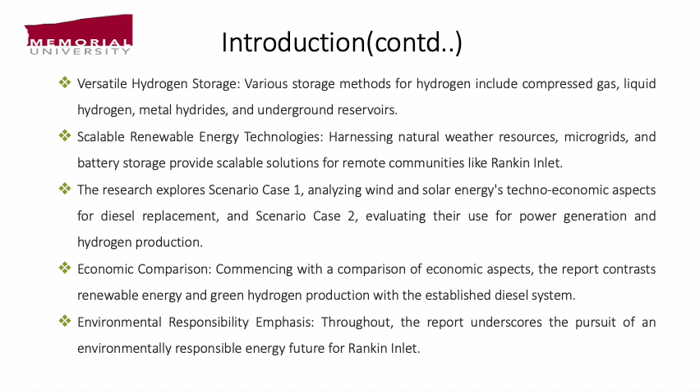The objective of scenario A is to conduct a techno-economic analysis of wind and solar energy, focusing on replacing the diesel system with renewable energy. The objective of scenario B is to perform a techno-economic evaluation of the wind and solar energy as well, and also to look at a way to produce energy and use that electricity to produce hydrogen in Nunavut, in Rankin Inlet.

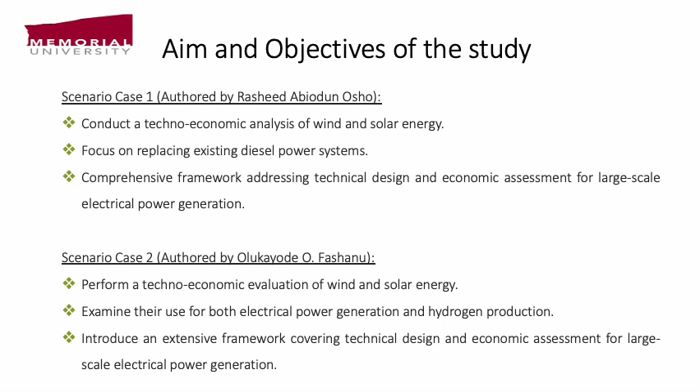Rankin Inlet is located in the Kudlulik Peninsula in Nunavut. It's the second largest community, just after Iqaluit, which is the capital. It has a population of about 3,000 people, and it occupies an area of about 20 square kilometers.

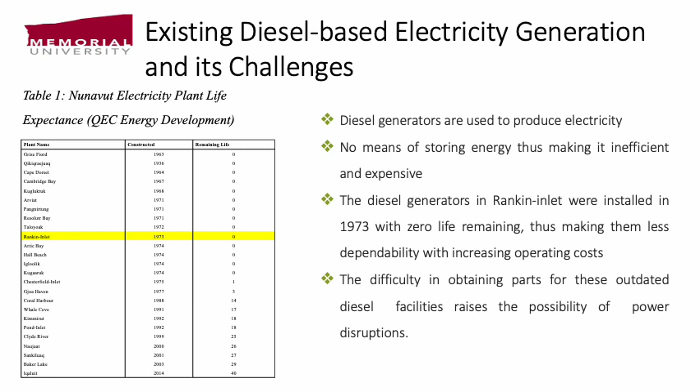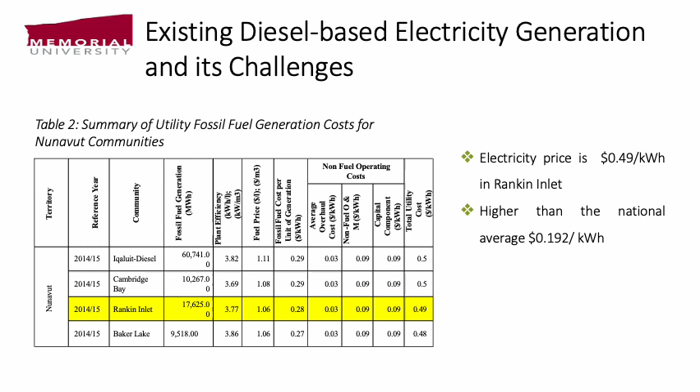The existing diesel system in Nunavut and the challenges: a look at the table shows us that the diesel generator in Rankin Inlet was established in 1973. That means it's old, with attendant repair and maintenance costs, which is making the cost of electricity quite high. As seen from the table, the cost of electricity in Rankin Inlet is 49 cents per kilowatt hour, which is higher than the national average of 0.192 per kilowatt hour, and that calls for immediate attention.

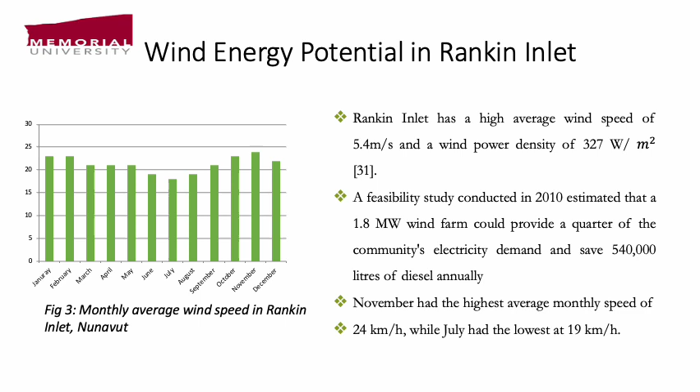Methodology: as said earlier, we have divided this study into two scenarios. Scenario one looks at the techno-economic assessment of wind and solar energy to replace the existing diesel system. Scenario two looks at evaluating utilizing wind and solar energy for both electrical energy generation and hydrogen production.

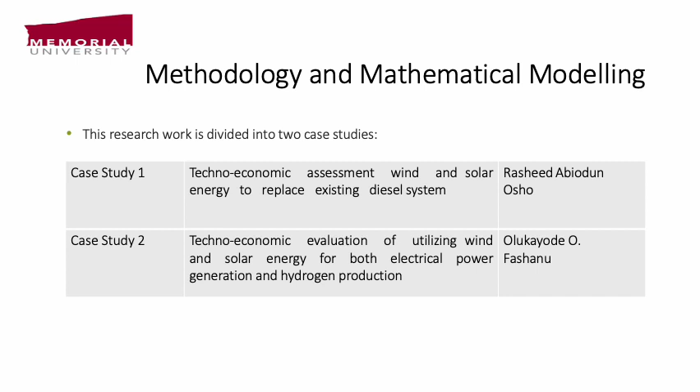Case study one evaluates wind and solar power energy to replace the existing diesel electricity. The Rankin Inlet load is about 17 million kilowatt hours per year, which comes to about 2.3 megawatts, and with a reserve margin of 15%, it comes to a daily load requirement of about 55,000 kilowatt hours per day. So the proposed renewable energy solution must be able to meet this need at a cost that is competitive.

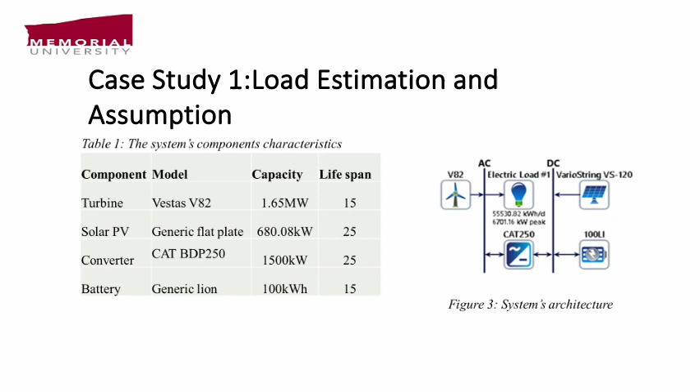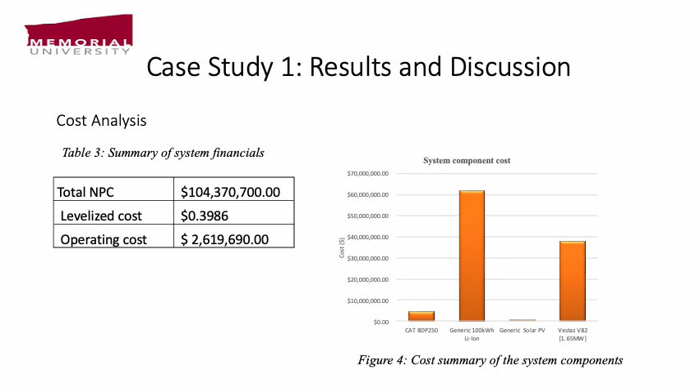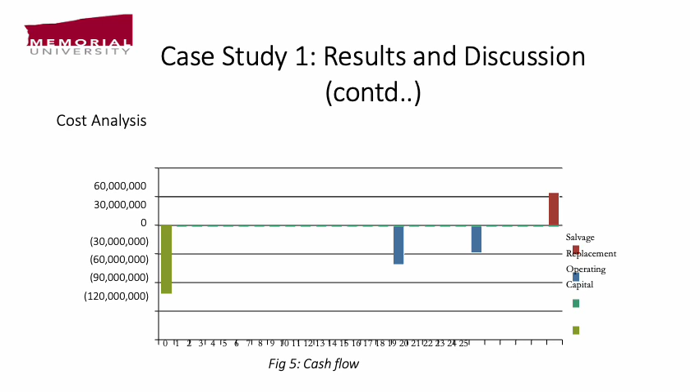Next is the cash flow. As seen on the graph, the capital cost is a bit high, followed by the operating cost, and finally we have the salvage, which is coming from the turbine and the battery.

Continuing the results and discussion, the generation of power with the proposed system is 36,000 megawatt hours, majorly coming from the turbine. Turbine is giving us 99%, while the solar PV is giving us about 1%.

Next we see the graph which compares production with consumption and excess. Production stands at about 36 megawatt hours, while consumption stands at 20, and then we have an excess of about 16 megawatt hours. The excess can be used for other applications. We can even sell it to the grid and make some money for the community.

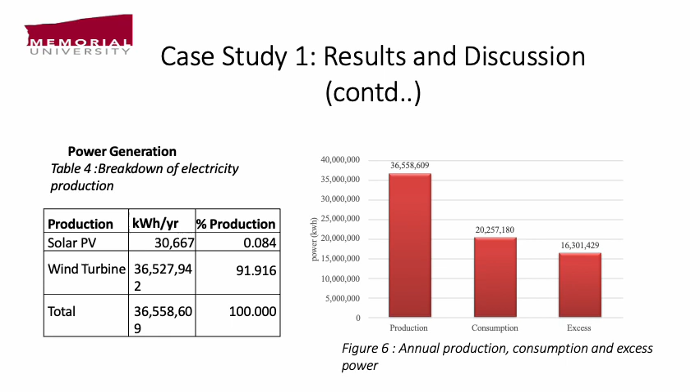Finally, under case study 1, we're looking at the economic analysis and comparison with the diesel system. From the table, we can see that with this proposed system, we will be saving. Of course, first we're seeing that we're generating over 100% of the required load, which means that the system can actually replace the existing system in Rankin Inlet.

We can also see that the LCOE is 0.39, which is less than the cost of the electricity. Electricity is sold at 49 cents, while the LCOE is 39 cents. That's very good. It means that the project is investment worthy.

We can also see that the diesel system is consuming about 4.6 million liters of diesel every year, which comes to about $5.6 million that will be saved with the use of this proposed renewable solution. And finally, we have the GHG emission coming to about

14,800 tons of CO2 equivalent with the use of the diesel system. With the renewable energy solution that we're proposing, that amount of GHG will be saved, and if we apply the rate of emission, which is about $50 per ton of CO2 equivalent, we would have an annual saving of about 740,000 Canadian dollars every year. That comes to a lot of savings. So it means that this system that we're proposing is economically viable, and the impact on the environment is also quite minimal.

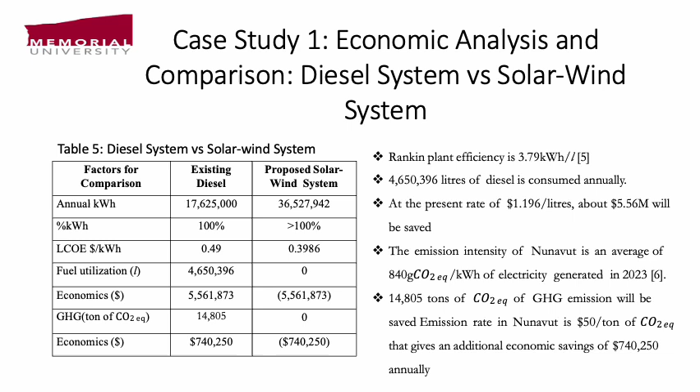So the annual cumulative electrical load, the annual electrical load in Rankin Inlet is 17,625 megawatt hour per year, which running to a daily average of 48,287 kilowatt hour per day.

In this simulation, we have an additional energy load of 1,230 kilowatt hour per day, which is required for the compression and intercooling process of hydrogen at a rate of 6 kilowatt per kilogram to store about 205 kilogram per day.

Consequently, the total energy demand will now amount to 49,517.70 kilowatt hour per day.

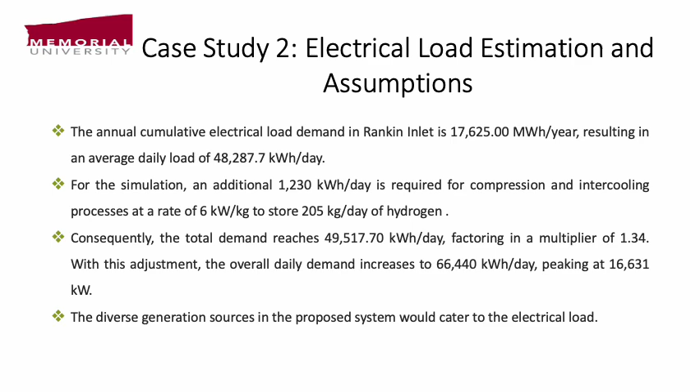By factoring the multiplier factor of 1.34 with the adjustment, the total load will now result to 66,440 kilowatt hour per day, peaking at 16,631 kilowatt. These are the generation sources in the proposed system that will cater for the more electrical load and the power that will be required to generate more hydrogen through the electrolyzers.

As I mentioned earlier on, these are the parameters we consider. According to Statistics Canada, the total number of registered vehicles as of 2019 in Nunavut is about 7,019 vehicles.

So that means that by using the mathematical modeling, since we know the total population to be 36,858, with Rankin Inlet having about 2,975, we can deduce that the total number of cars being used in Rankin Inlet to be 573 cars.

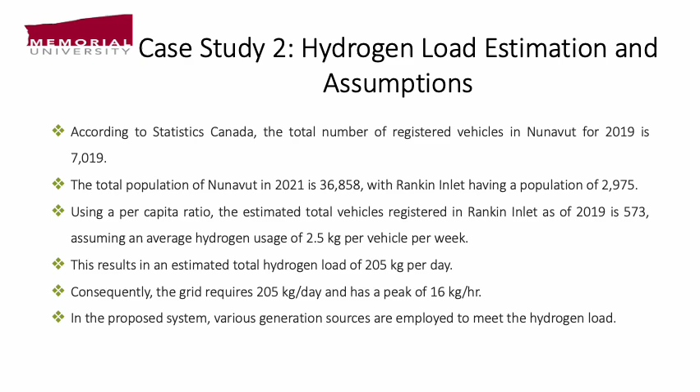So that means that by considering 2.5 kilograms per vehicle per week, by doing these calculations, we can conclude that Rankin Inlet will be consuming about 205 kilograms of hydrogen per day if we are to use fuel cell electric vehicles in Rankin Inlet.

The system architecture is set up. The whole equipment we are using for these simulations are listed in table 6.

As we can see, PV dedicated converter storage, battery storage. In this case, we are considering a generic battery, 4 hours, 1 megawatt lithium-ion battery. We are having a size of 12 strings, a system converter of CAT BDP 250s, electrolyzer of about 10,455 kilowatts, and the dispatching strategy we are using here is HOMER load following.

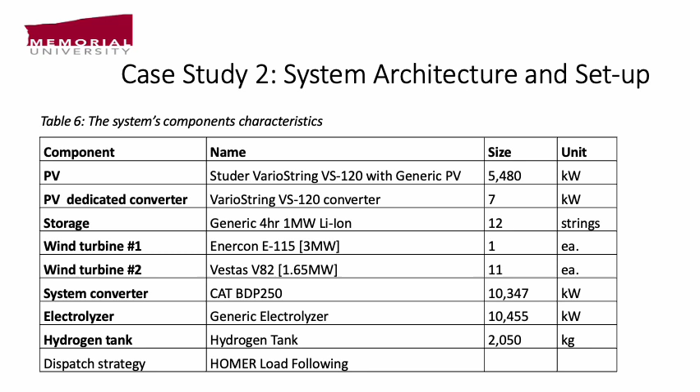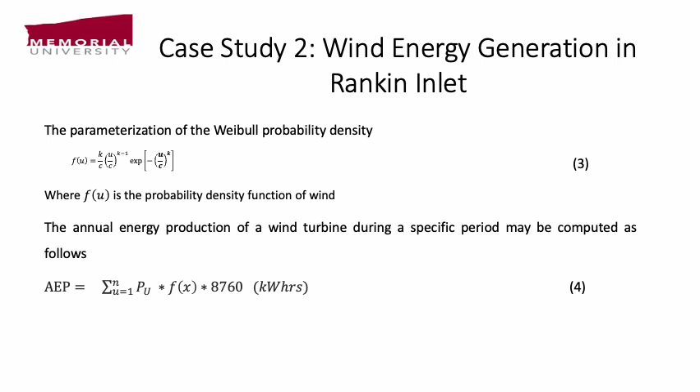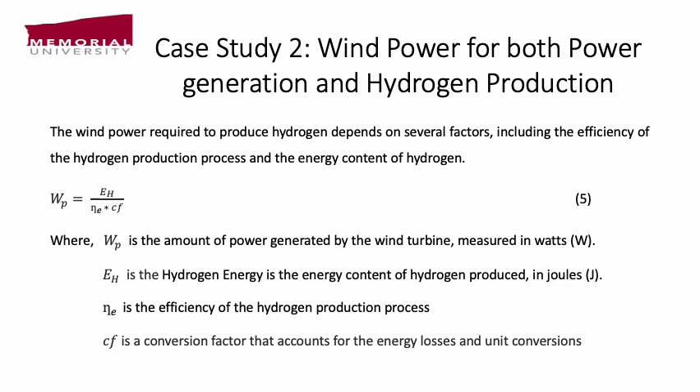Continuing, the wind power required to produce the hydrogen, the equation is listed in equation 5, and the annual energy output for the PV systems is listed in equation 6.

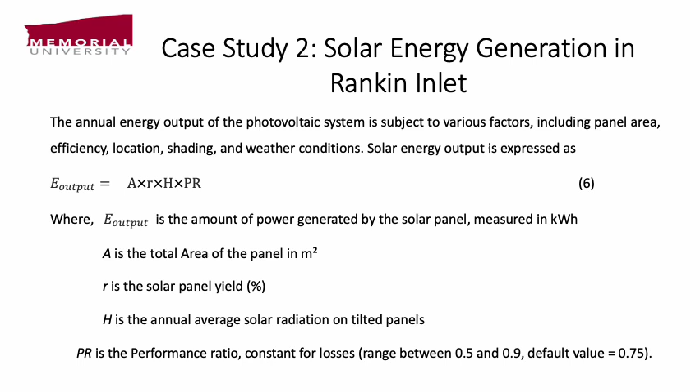The economic analysis, the net present cost here is listed in equation 7. The levelized cost of energy is captured in equation 8, and equation 9 illustrates the equation for the levelized cost of hydrogen.

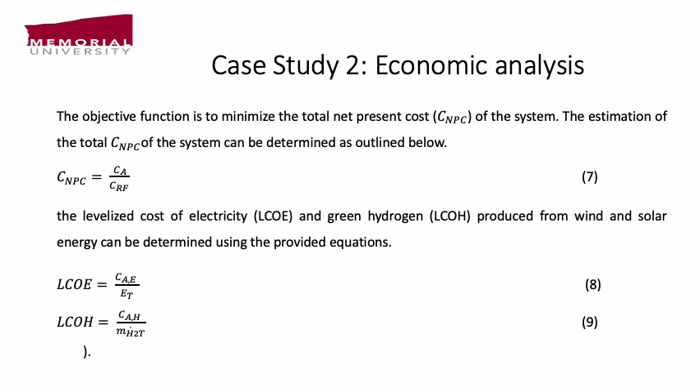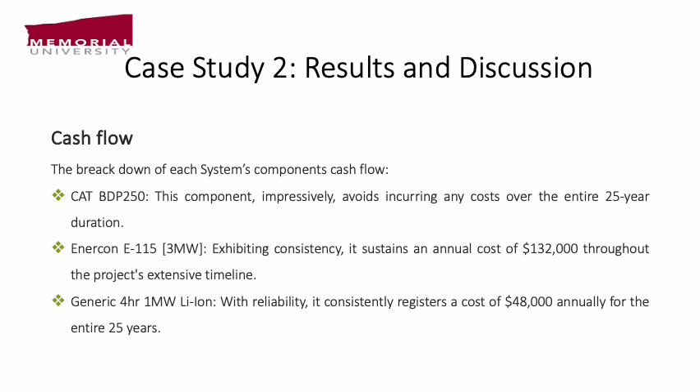Your cash flow analysis. The breakdown of each component of cash flow is listed below. As we can see, CAT BDP250, then the Enercon E115, the generic lithium-ion battery.

The Studer VarioString VS-120 used for the simulation is also listed here as well. Likewise, the second turbine used, the Vestas V82, is also listed here.

As I mentioned earlier on, all the systems used here are listed below.

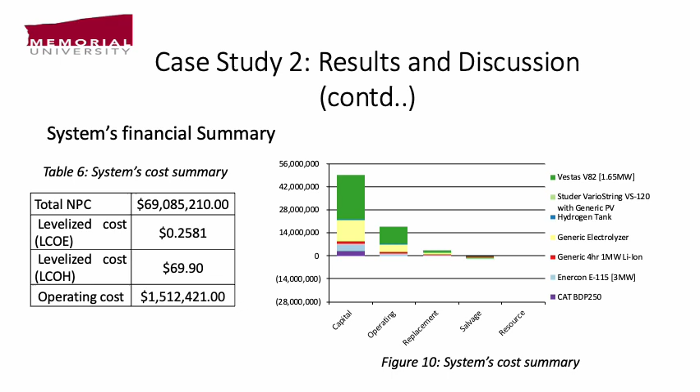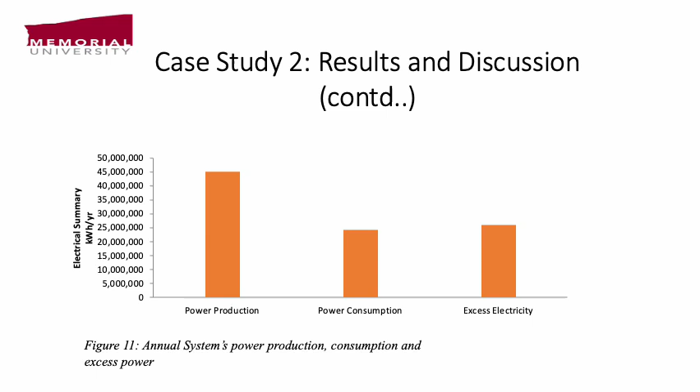The levelized cost of energy for the new solution is produced at the rate of $0.258, as compared to what is used at Nunavut at the moment, which is about half the price. Now the levelized cost of hydrogen.

There's no hydrogen production at Nunavut at the moment, but compared to the proposed solution we are considering, we have to produce hydrogen at the rate of $69.9. This seems much higher, but if you contrast it with the levelized cost of energy, which is about half of what is currently pricing energy at Rankin Inlet, the savings made from this are used to augment whatever the cost of energy produced, so there are also savings.

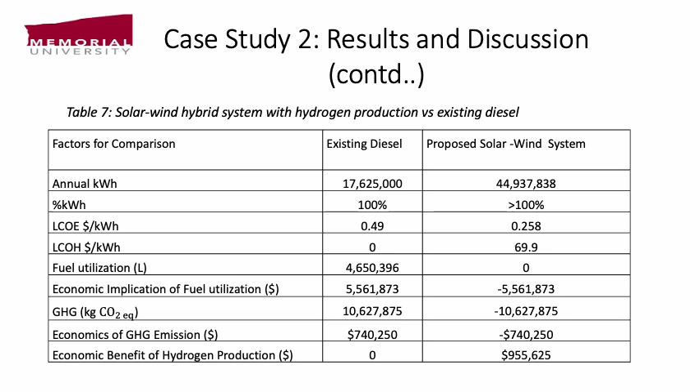So either of the two case studies can replace the existing system being used at Rankin Inlet at the moment. In terms of total energy production, these two case scenarios produce way more energy compared to what is being used at Nunavut, and in terms of the levelized cost of energy, case studies 1 and 2 tend to be much lower compared to what is currently being paid at Rankin Inlet.

The levelized cost of hydrogen is only present in case scenario 2, which is actually producing hydrogen, at a rate of $69.90. In terms of GHG emissions, neither of these two case scenarios is producing any, as compared to the existing system. This means the two case scenarios are much more environmentally friendly than what is currently being used at Nunavut.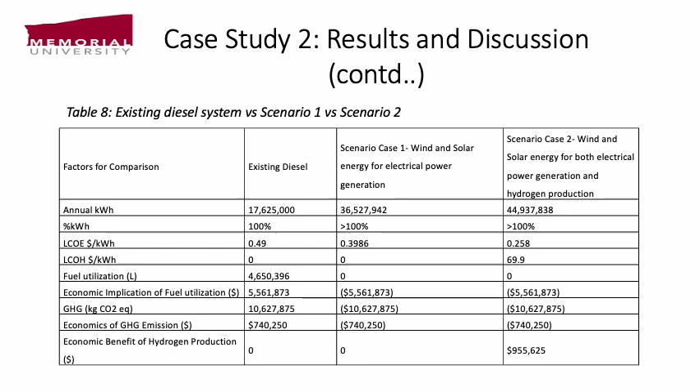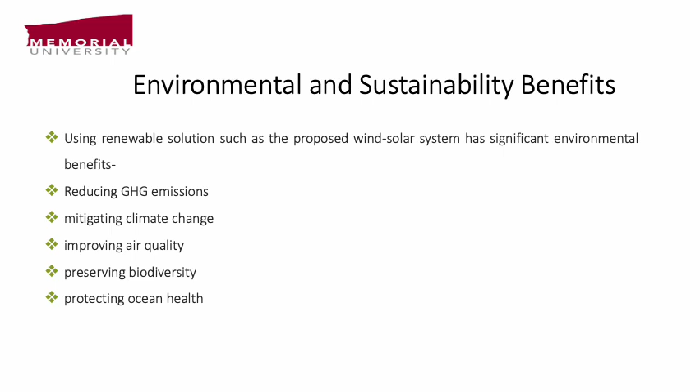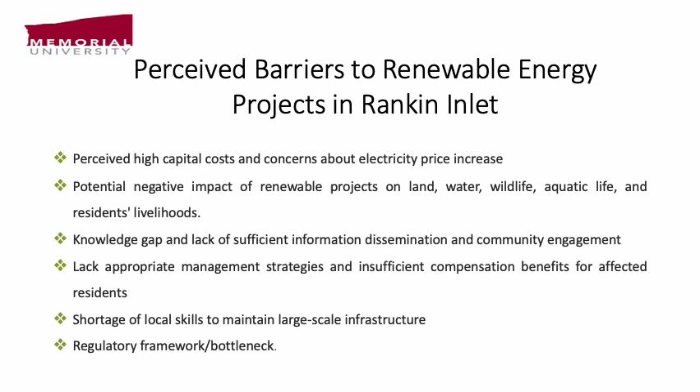Environmental and sustainability: using renewable solutions such as these two proposed case studies has significant environmental benefits, such as reducing GHG emissions, mitigating climate change, improving air quality, preserving biodiversity, and protecting ocean health, promoting sustainability. Perceived barriers to renewable energy projects in Rankin Inlet include perceived high capital cost, negative impact of renewable energies on land and other areas, the knowledge gap and lack of sufficient information, lack of appropriate management strategies, shortage of local skills, and regulatory framework issues.

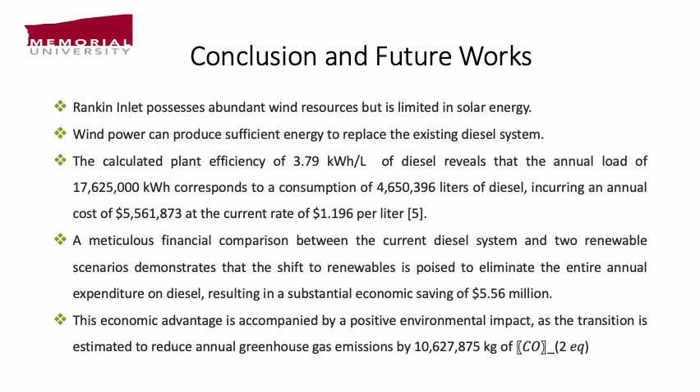Conclusion: Rankin Inlet possesses abundant wind resources but is limited in solar energy. Wind power can produce sufficient energy. A meticulous financial comparison between the current diesel system and the two renewable scenarios demonstrates that the shift to renewable energy is poised to eliminate the entire annual expenditure on diesel, resulting in substantial economic savings. Thank you.